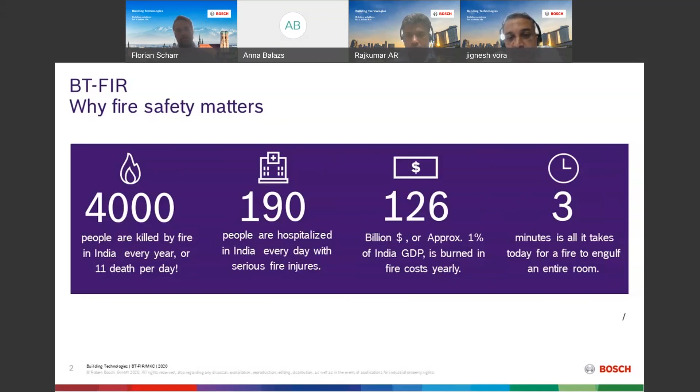I have a question. Why does fire safety matter a lot to an industry? Around 4,000 people every year are killed by fire in India. That is 11 deaths per day, and 190 people are hospitalized in India every day with serious fire injuries, and close to 126 billion, approximately 1% of India's GDP, is burned in fire cost yearly. And 3 minutes is all it takes today for a fire to engulf an entire room. So a fire and safety system is of utmost importance for any commercial, residential, or industrial application.

I would like to give you a brief about the Bosch Building Technology Division of Fire. We started our business in business unit Fire in 1920, and today we are sitting in 2020. So Bosch has close to 100 years of experience in business unit Fire. We started our division of business unit Fire in India in the year 2005, and then we came up with the dual ray smoke detector technology, the FPA 5000 fire panel, and in the last 3-4 years a video based fire detection system, the Safety System Designer tool, and this year we have launched the Avenar panel 2000 and 8000 series. So every year we are coming up with a new development for the fire industry and a new product.

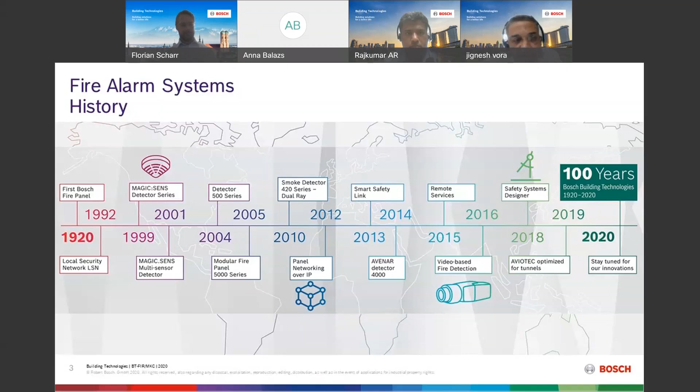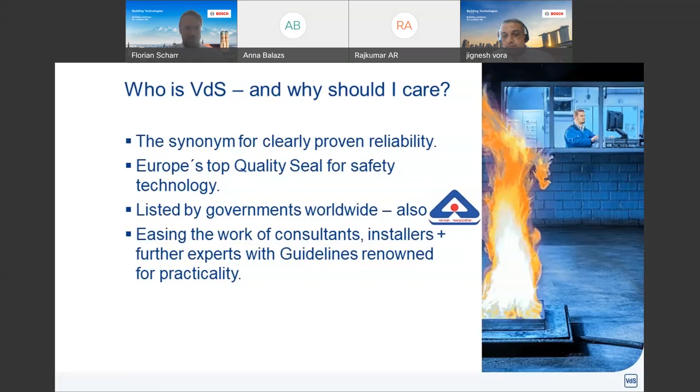European safety norms basically started in the year 1967 with a terrible fire tragedy in Brussels. We had a fire at a mall, 251 dead. And if you look at the pictures and say, hey, this second Brussels picture is looking a lot like Kolkata, it is because it is Kolkata, because we can say the European safety norms and the IS, for example, the 2189, are kind of sharing the same background.

We had this heavy fire in 1967. In India, there were a lot of really heavy, tragic fires with hundreds of losses in the year 2008. And if that happens, of course, there is high pressure from the public opinion and from the media on the government. Hey, don't just go on like nothing happened, do something. And in both cases, European and Indian governments decided, okay, let's come up with a standard. So one consequence of this Brussels fire was the European safety norms.

The first safety norm we had was on fire classes, and every European norm is numbered in the order it is appearing. So the second European norm ever, that was the one on fire classes, followed in the year 1976 by the product standard EN54 for fire detection and alarm systems. Target: test methods, performance criteria for effectiveness and reliability to be assessed and declared.

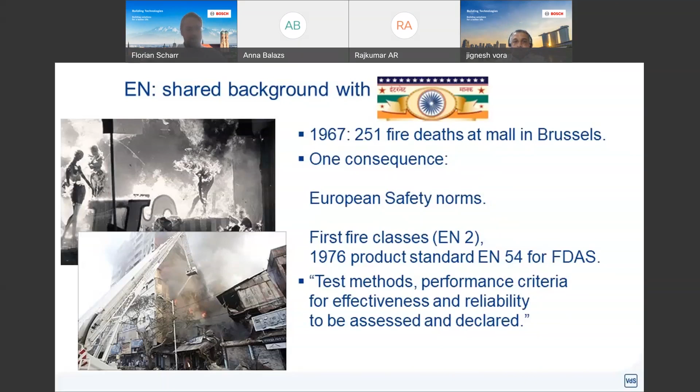You'll get a presentation afterwards. This is just a little overview so you can see everybody from so many countries, people are putting their brains into the EN series.

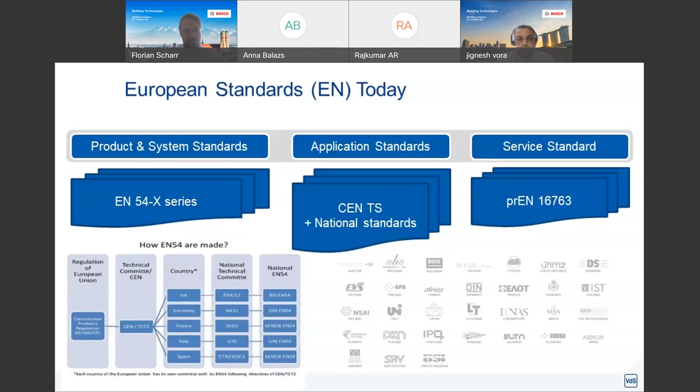Now I'd like to take you on a little standard comparison between the European norms and Underwriter Laboratories standards for fire detection, control and indicating equipment, CIE. Basically, those standards, not only for the CIE, but for every other technology, are in constant motion, in flux. We have a nice idea, the Americans also add that. The Americans have a nice idea, we add that. That is copying for global safety, basically, and that is why you are seeing a lot of similarities here.

A few differences. First of all, the humidity. UL is testing at 95 plus minus 2%. We are testing at 5 to 95%. I would say in many regions of India, we are probably way closer to the 5% humidity than to the 95% from UL.

Then you also see the system fault. UL products don't have that at the moment. We think this is very important, and I assume that UL will take this into account in the next issue. But currently only VDS approved systems like those of Bosch offer this. The increasingly important software within the FDAS is constantly monitored, mostly by a watchdog program. And if a single byte is missing or goes just a little the wrong way, then instantly your customers are informed.

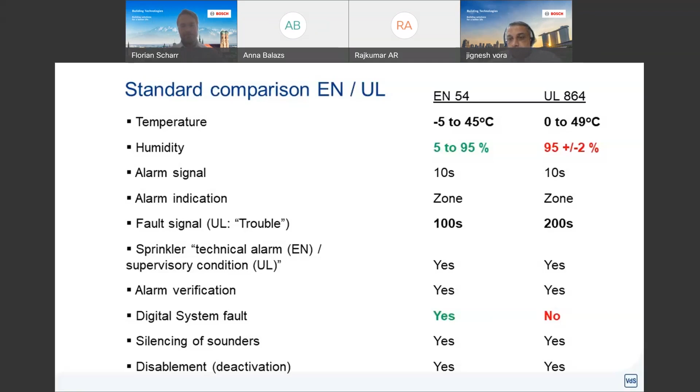You also have, one above the lowest row, the silencing of sounders. Of course, we both have that. The first question I asked when I saw this, and which I also hear quite often when presenting this, is what? Why would I ever want to silence the sounders? That is, for example, when the fire brigade arrives, they like to turn the alarm off for coordinating their rescue activities. But if a fire breaks out at any other place within the building, the alarm does start again.

So same as at Underwriter Laboratories, the VDS testing, the EN testing is subdivided into two main parts, functional testing and environmental testing. Basically, our job is to heavily mistreat the products and the systems and then make sure they still work. So you can see directly at first sight, yes, this has VDS on it. This will save human lives and entire companies. Long-term, after artificial aging, and also under even the toughest environmental conditions.

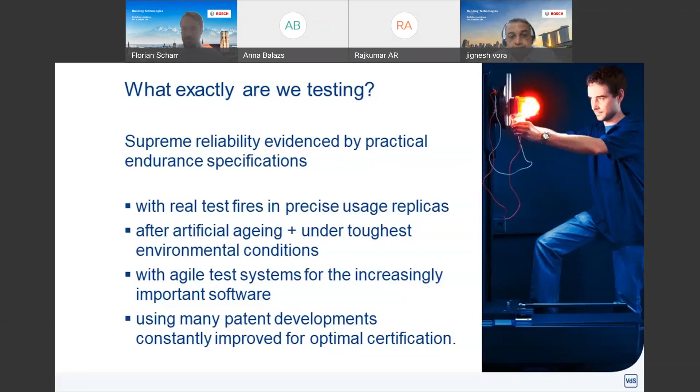Because no matter whether it's the Cricket World Cup, India just scoring against England, India winning, or it's the high point of the Diwali festivities, the systems are safely watching 24 hours a day, 7 days a week, 365 days a year, clearly proven in our laboratories. I have directly underlined here the two probably decisive points for you.

Of course, there's a frequent situation that consultants, planners, and installers report to us again and again. They are to install a fire protection system, and the authorities maybe require compliance with Indian standards or ISO or EN. The operator may state, hey, we are part of an American corporation, so our fire alarm technology must comply with NFPA requirements. And then maybe the insurance company comes along and demands this system must be installed according to VDS guidelines, because that's the German insurers.

When this happens, like so often, those responsible, so mostly you fine listeners, usually ask themselves the following very important technical question, and that is, why me? But hopefully, we can make your work much easier here.

VDS approved products comply at all times with European standards, almost always with ISO specifications. And VDS approved products can always be used in installations according to IS 2189 and also NFPA 72, and also NFPA 2001 if some of you are also doing gas. For this, you will receive some written proof right after this webinar. So with VDS approved Bosch products, you are directly covering all relevant standards directly from one source. Done.

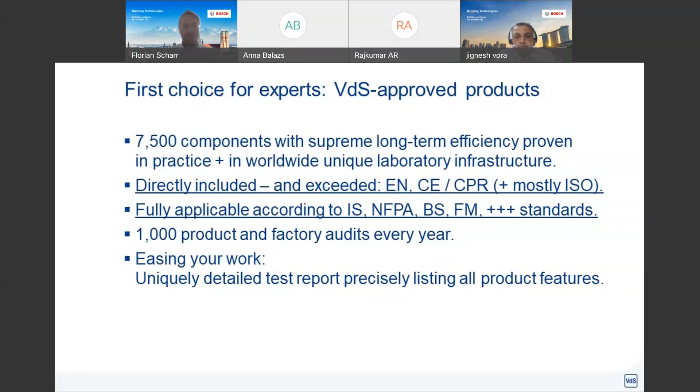Okay, don't worry, I'm not going through all this. I'll just highlight some points. As I said, you get the presentation afterwards, so you can check out every detail if you like. Comparison between VdS, BRE, FM, UL on heat detectors. If you look at point 4 and 5, you can probably not read it on the computer, but later on the PDF. UL is currently not ensuring the detectors also react in high ambient temperatures. So we think this is quite important, especially for the usual heat in most Indian regions.

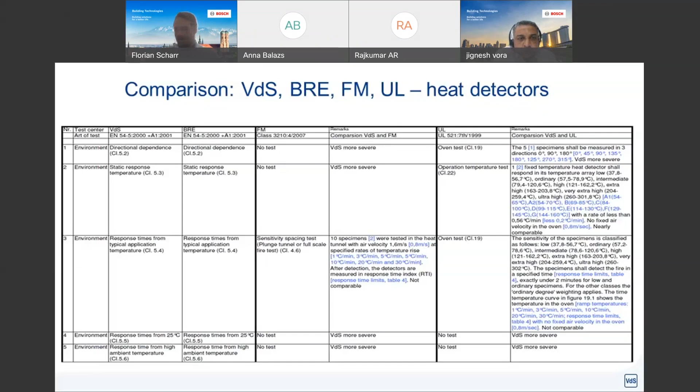Same thing on the smoke detectors. Point 2 here is the ingress of foreign bodies. This was one of the main triggers of false alarms in Germany in spring and summer when loads of insects are flying around. And many Indian regions always have German spring and summer temperature. And as we know, frequent false alarms caused by the insects entering make users hate the technology and not react when a real alarm is happening. The intrusion of bugs or other insects can be prevented by a very simple, cheap grid. So I strongly assume that in the next guideline standard version, UL will reasonably demand this.

Yeah, a little explanation also may be important for your work on point 4, repeatability. We measure every result 6 times in a row to make sure that the detectors are not just containing a random luck generator. And point 6, we perform all tests with 20 detectors to make sure they all react the same way, all for ensuring your safety, the safety of your customers.

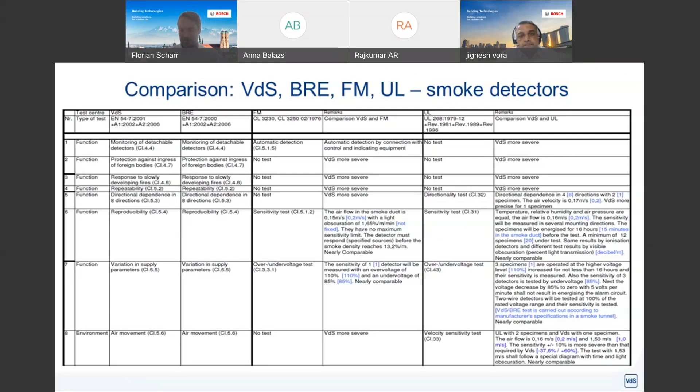Another important assurance for you and a unique selling point for the VdS approved products is the system approval. Each of us knows the case. We have a system in which, let's say, 100 parts are installed and combined. 99 of them work perfectly, 1 is scrap. Then there's a pretty good chance that the entire system will not work, cannot save anyone, cannot protect any building. With VdS approved technology, this cannot happen because we always ensure the safe functioning of all components in their direct interaction as a whole system, also at full capacity like power for FDAS or the highest pressure for extinguishers.

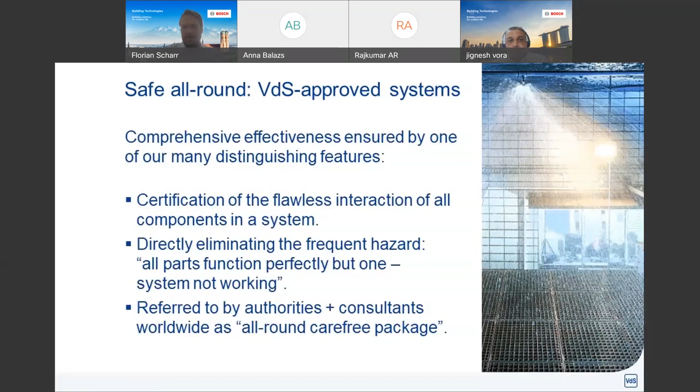Yeah, so NFPA 72 is very important, very often used around the world. So a little more background information here. NFPA requires listed products, also named approved or certified. And the thing is, since NFPA is a US standard, people sometimes assume listed means UL listed. But NFPA by no means requires that testing and listing shall be based on an American product standard. They leave this open on purpose, allowing for solutions that provide an equivalent or better safety level, as quoted from chapter 1.5.

They demand a regular monitoring of product, of course done by VdS and any EN institutes, because it's important, because we want you, when you buy it, to get exactly the same quality as was tested in a laboratory. And a competent organization accepted by authorities having jurisdiction. Yes, VdS is #1 in Europe and accepted by authorities all over the world, of course, including Bureau of Indian Standards, BIS. So products approved by VdS, like the Bosch products, can be used anytime in NFPA 72 installations.

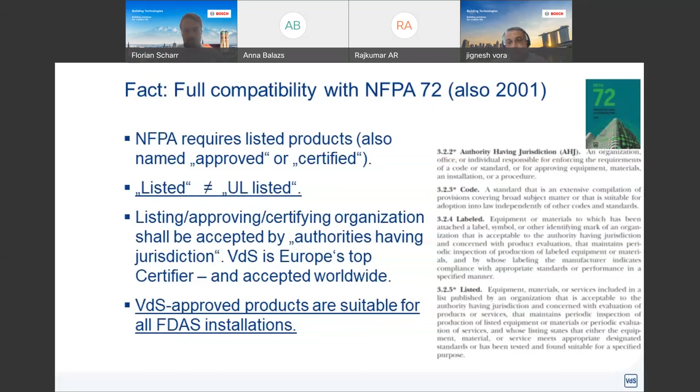Yeah, I told you European norming started in 1976. At that time, we were already around about 70 years old. Founded 112 years ago, which is nice and fitting because it's the German and Indian emergency call number. Backing you with worldwide unique expertise gained in more than 30,000 system inspections every year. And the core point, detecting any flaw in the highly complex technology immediately and not while fire is raging, while every second counts. Not a good moment to find out a system isn't working that good.

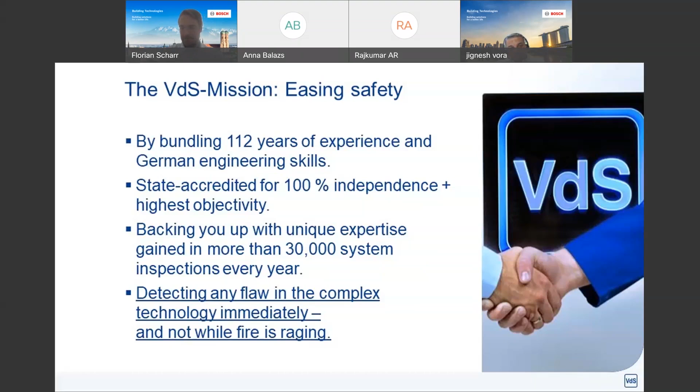So as you can see, we are also cooperating with, for example, the Fire and Security Association of India, with FM Global, and also with our UK partners from LPCB. There is the European Fire and Security Group, consisting of the top laboratories on the continent. They are regularly auditing and attesting us, and we are also sharing the outcomes of our certification. So for example, if anybody has LPCB certification, it's quite easy to get VdS as well, or vice versa, because we are accepting each other's certification outcomes.

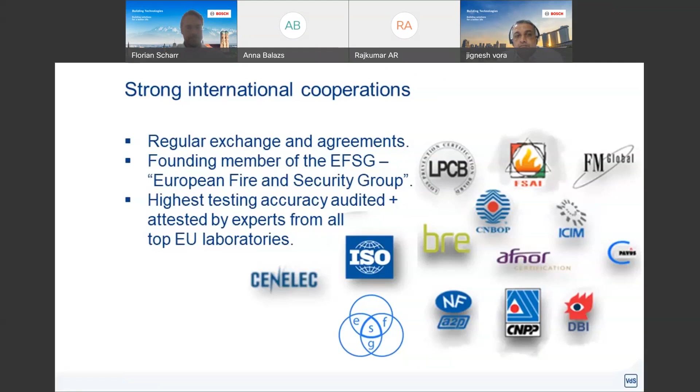The core point, since we are 112 years old, is we have been testing fire protection technology ever since it was first used. So we know exactly where to look to find any flaws that might endanger your customers or your work.

One more thing that could be important for your work is that a very big player in the safety markets are, of course, the insurers. So when you are dealing with them, it should be quite helpful to mention that VdS was originally founded as the official sprinkler testing laboratory of the German insurers. Sprinkler, because in 1908 that was the only automated fire protection technology existing. And we are still 100% owned by the German Insurer Association, with members like Allianz or Munich Re.

And of course, with annual payments for fire damage amounting up to 2 billion euros every single year in Germany alone, the insurers keep a very close eye on fully reliable safety technology.

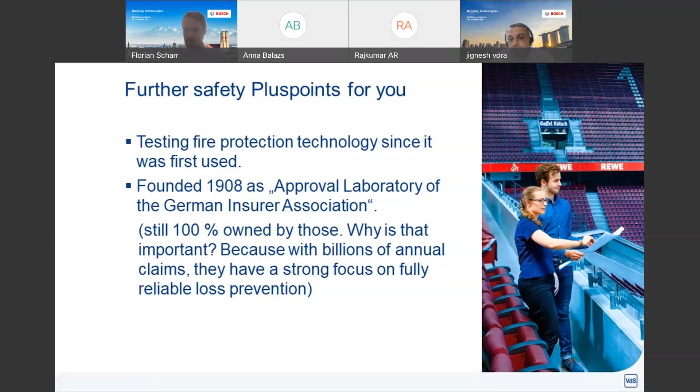Now we are also publishing our own guidelines, renowned worldwide for highest precision and usability. And we're quite happy that the safety and construction press, also I guess it was the Indian Safety Review, named our guidelines the technical holy books. Usually VdS comes up with a guideline first, and then many years later EN and ISO and other international standards are following by copying a lot from our guidelines. We have more than 700 publications, many of those for free download.

Unfortunately, if you look at the shop address in the last row, why is that italic? Because our publishing house is currently making over the international version of the shop, so it's unfortunately not working right now. You'll get a message from Bosch once we have that done, I think in around about 1 or 2 weeks. If any of you is looking urgently for any kind of VdS product installation P&I guideline, just send me an email and I will send that over to you.

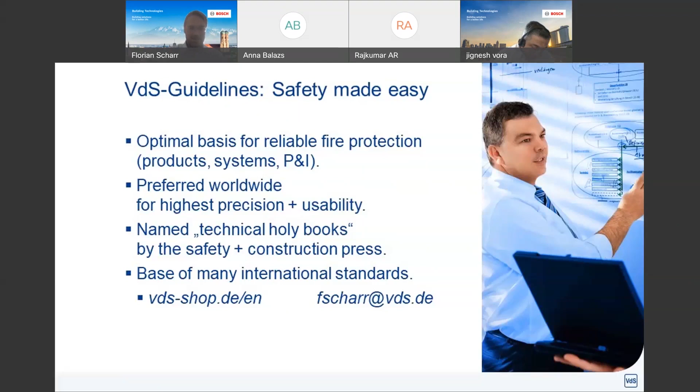And also, concerning the guidelines, especially for those of you who are planning and installing fire detection and alarm systems, I've added some info from the VdS P&I guidelines. Too much for our time slot now, but as I said, you'll get the PowerPoint afterwards, and this will hopefully be supportive for your important daily work. The one here on the recommended choice of detectors for special surroundings.

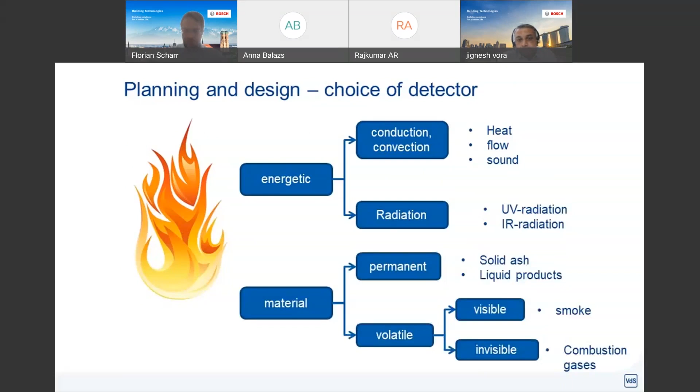And then there is the guideline VdS 2833 on overvoltage protection, unfortunately available at the moment only in German. So I have taken out the most important key points and have listed them for you here, because I hear there's also a lot of thunderstorms happening in India, so maybe important for protecting your work.

So the core question when it comes to fire protection technology is always, does the whole thing work? Will it work after it's been installed years ago and then suddenly there's the emergency? And the mission of VdS is to answer exactly this core question for you. You can tick off this highly important point and concentrate on all the other difficult planning and consulting issues you need to focus on. We take this very important duty off your back because you will know long-term reliability made visible at first sight with German engineering.

So I hope this was useful to you, to our joint cause of protecting human lives and costly properties and the environment by reducing fire.

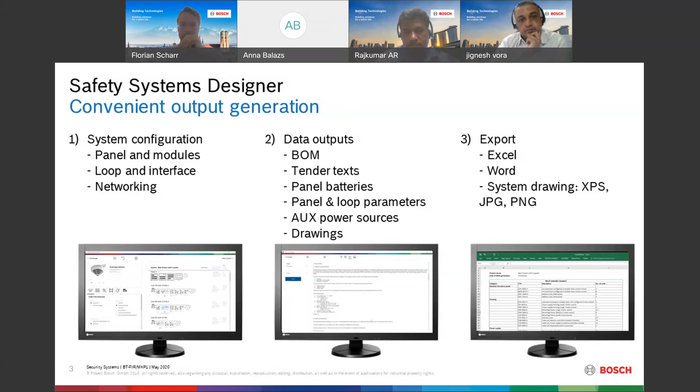So overall, I believe that this fire calculator, or safety system designer as I would like to call it, is a tool for design and estimation engineers, point one. And of course, it is also a tool for the project engineers. Now you can also introduce this to consultants, to specifiers, to planners. The reason being, you can get an output of a fire alarm system in a tender form, in a BOM form, or export a drawing out of this software, which obviously the consultants would want whenever a system is being designed.